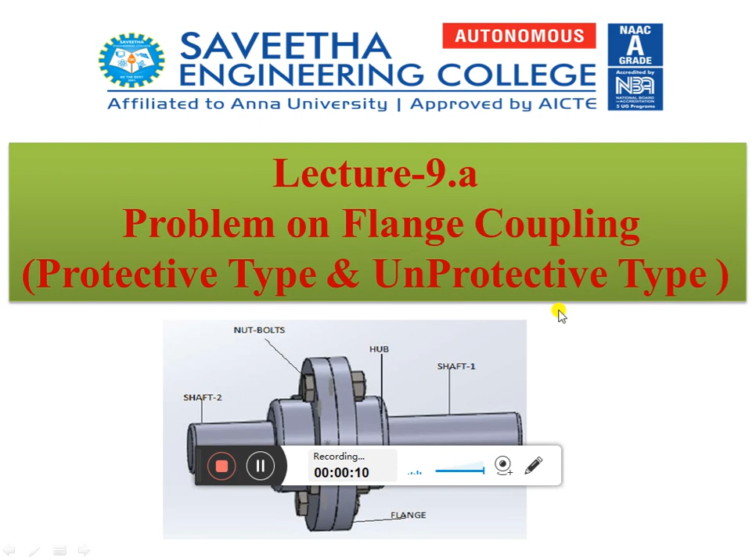So the problem is: design a cast iron protective type flange coupling to transmit 15 kilowatt at 900 rpm from an electric motor to a compressor. The service factor may be assumed as 1.35. The following permissible stresses may be assumed.

The shear stress for shaft, bolt and key material is 40 megapascal. Crushing stress for bolt and key is 80 megapascal. Shear stress for cast iron is 8 megapascal. Draw a neat sketch of the coupling. So this is a question for protective type flange coupling.

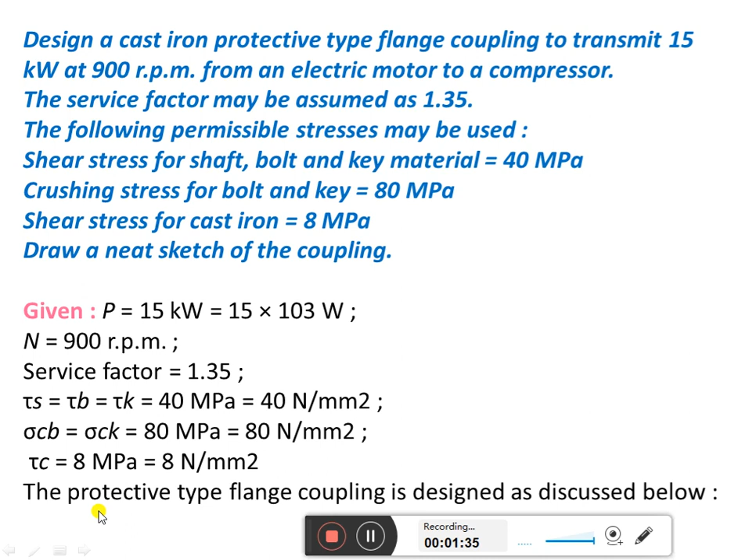So your given data is P equal to 15 kilowatt and N equal to 900 rpm. Service factor is 1.35, the shear stress for shaft, bolt and key is 40 megapascal, crushing stress for bolt and key is 80 megapascal, and shear stress for cast iron is 8 megapascal. So it's the protective type flange coupling. You have to design and you have to draw a diagram.

So first you have to identify the design of hub. We know the torque equation, T equal to P into 60 divided by 2 pi n. Substituting the power and speed, we get the torque 159.13 Newton meter. Then the maximum torque we have to calculate. The service factor is 1.35, so the maximum torque is equal to 1.35 into 159.13, the torque T mean already found, which is equal to 215 into 10 power 3 Newton mm.

We know the torque transmitted by the shaft, T equal to pi by 16 tau d cube. From this equation we can calculate the diameter of the shaft, d equal to 35 mm, which is a standard diameter. We know the relationship between capital D and small d: capital D equal to 2d, which is 70 mm. Length of the hub L equal to 1.5 d, which is 52.5 mm. These relationships we already know, so we can easily find capital D and capital L.

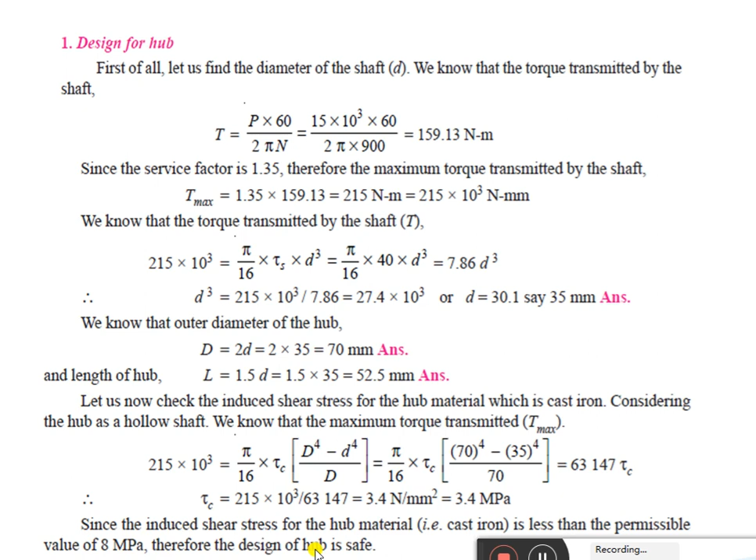Then design of key. Based on the shaft diameter of 35 mm, we take the width and thickness of the key from the design data book, T equal to W equal to 12 mm. The length of the key small l is equal to capital L, already found in the previous step as 52.5 mm. Let us now check the induced stress in the key by considering shearing and crushing. T equal to l into W into tau k into d by 2.

So if you substitute the values of small l, W, d, we know the value of tau k, that is shear stress for key. So it is 19.5 megapascal.

Consider the key in crushing. We know that the maximum torque transmitted T max, so T equal to L into t by 2 sigma Ck into d by 2. If we substitute the value of T, L, d, we know the value of sigma C. We found the value of sigma C. The sigma C is 39 megapascal. Since the induced shear and crushing stress in the key are less than the permissible, therefore the design is safe.

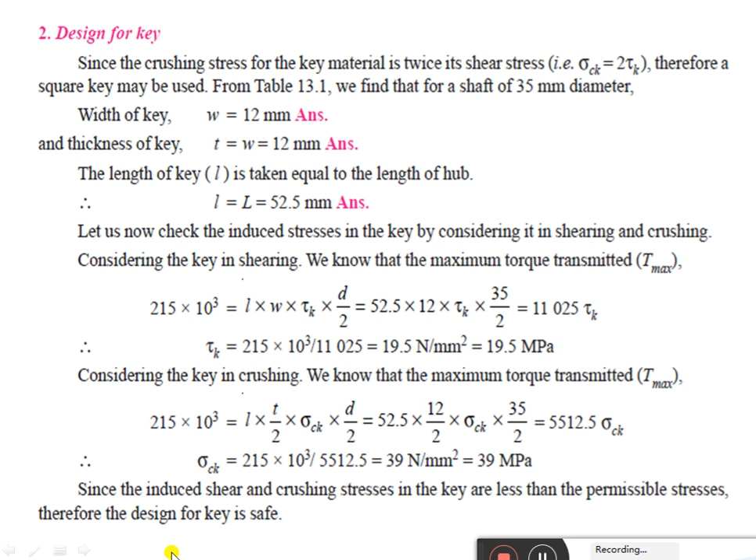So design of flange. The thickness of flange TF is given as 0.5 d. So the relationship is given, that is TF equal to 0.5 d. So we will get TF equal to 17.5 mm.

Now check the induced shearing stress in the flange by considering flange at the junction on the hub is in shear. So T equal to pi capital D square divided by 2 into tau C into TF. If we substitute capital D value and TF value, we found the value of tau C, which is equal to 1.6 megapascal. Since the induced shear stress in the flange is less than 8 megapascal, therefore the design of flange is safe.

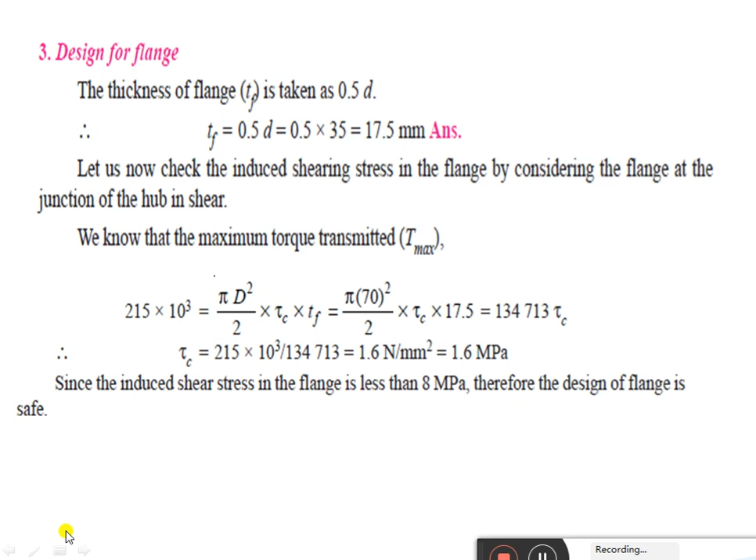Then the last step is design for bolt. So I have to find out the bolt dimension. So let d1 equal to nominal diameter of the bolt based on the diameter of the shaft 35 mm. Therefore let us take the number of bolts required for the flanges n equal to 3. The pitch circle diameter of the bolt, the relationship is capital D1, which is equal to 3d. So we found the value of 105 mm.

And the bolts are subjected to shear stress due to the torque transmitted. We know that the maximum torque transmitted T max, which is equal to pi by 4 d1 square tau B into n into capital D1 divided by 2. If we substitute the value of small d1, capital D1 and n, we will get the value of d1, which is equal to 6.6 mm. Assuming coarse thread, the nearest standard size of bolt is M8. So the bolt diameter we can take is metric thread of 8, M8.

The outer diameter of the flange, capital D2 equal to 4d, that is relation available in the supplementary data book. So you can find the value of D2 equal to 140 mm. The thickness of the protective circumferential flange TP equal to 0.25 d, which is equal to 10 mm.

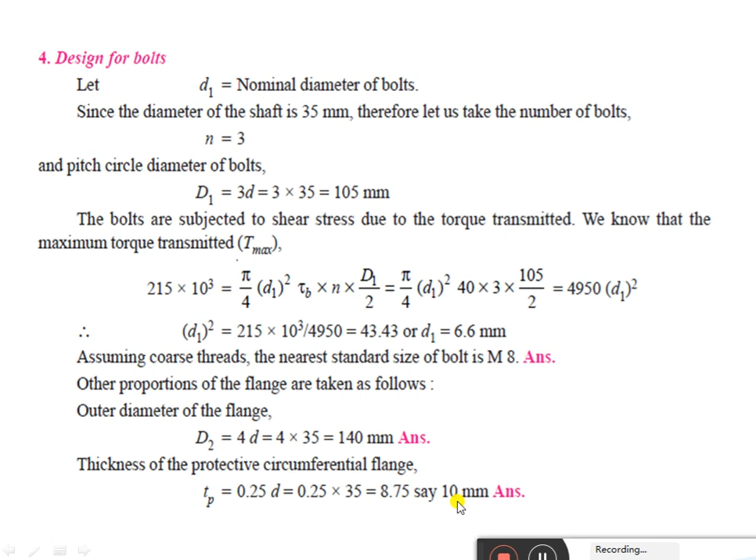So after calculating all the values, you have to draw a diagram and show the dimensions of the flange coupling. So draw the diagram and mention the dimension in protective type flange coupling. Small d equal to 35 mm, capital D equal to 70 mm, D1 equal to 105 mm, D2 equal to 140 mm, capital L equal to 52.5 mm, TF equal to 17.5 mm and TP equal to 10 mm.

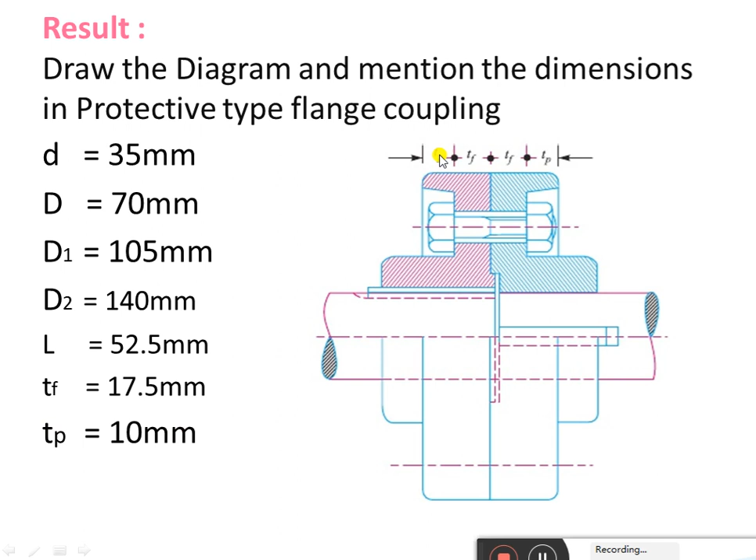So here TF and TP, so this is, we call it as protective type. It is protection for the bolt and nuts, that is TP. So this is protective type flange coupling. In unprotective type, the design procedure for the problem will be similar. In unprotective type, we need not find out the TP value. In unprotective type, there is no projection for the bolt and nut. So that is the difference between protective and unprotective type. The remaining procedure is all similar.

Try one more problem on this.